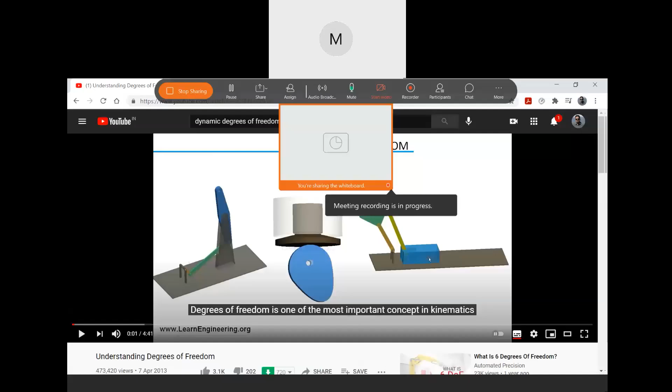So for your clearance, can you see my screen? Yes, sir. Okay.

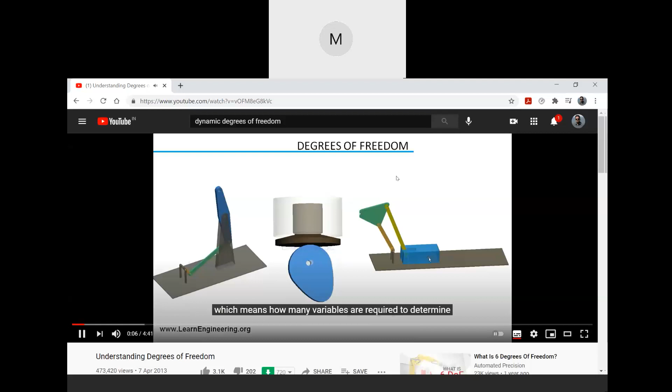Degrees of freedom is one of the most important concepts. Just try to understand. In kinematics, it means how many variables are required to determine the position of a mechanism in space. The position of this 4-bar mechanism could be determined just by knowing the angle or position of one of the members. So the degree of freedom is 1.

Similarly, the degree of freedom of this cam and follower mechanism is also 1. But to determine the position of this slider crank mechanism, we should know the angle or displacement of at least 2 members. So here degrees of freedom is 2. In this video we will learn how to predict degrees of freedom of a mechanism.

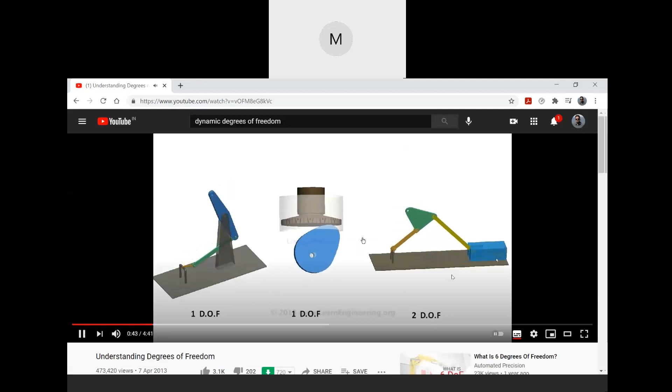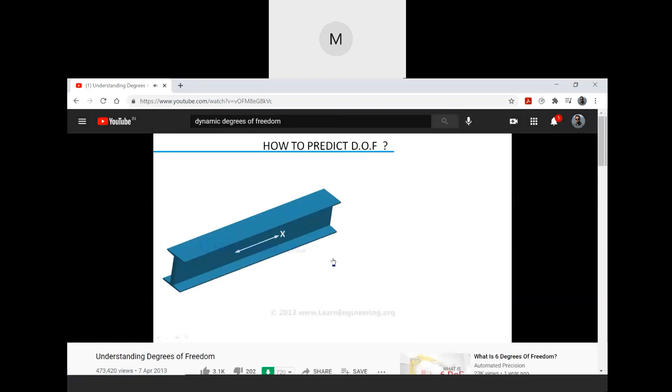Consider this rigid body in space. It could have 3 translatory motions like this. Also it could have 3 rotary motions like this. In total we need 6 inputs to determine its position. So, the degree of freedom of a rigid body in space is 6.

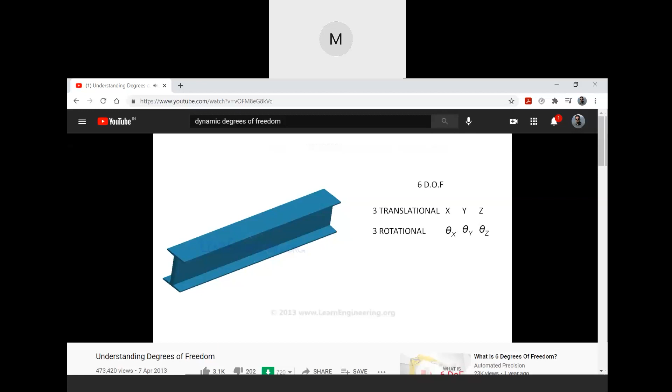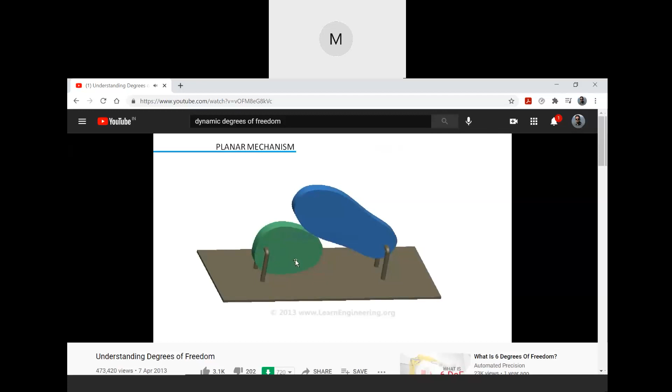If the body is in a plane, it can have only 3 motions: 2 translational and 1 rotational. So the degree of freedom of a rigid body in a plane is 3. Now, consider this planar mechanism. A mechanism is a collection of rigid bodies, or links, connected through pairs, provided one link is grounded.

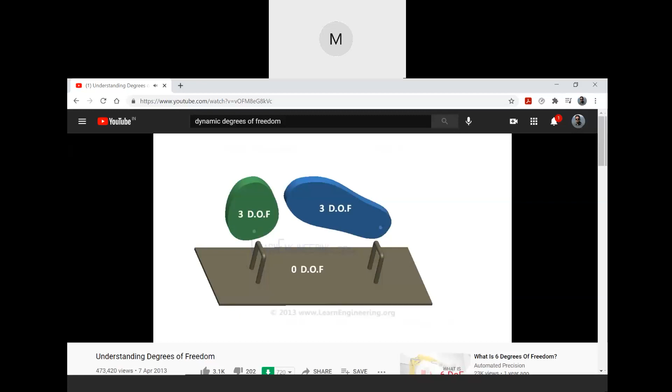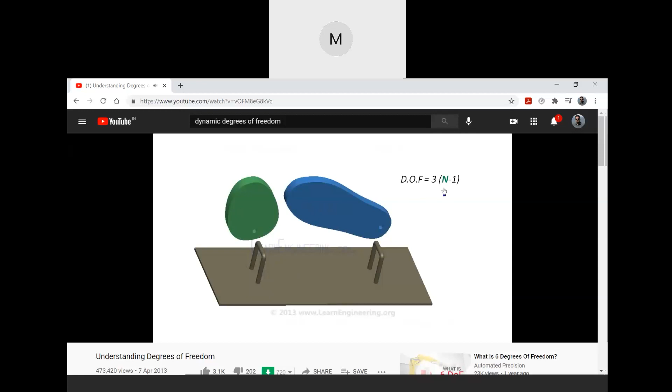If this system were not connected like this, then each link, except the ground, would have 3 degrees of freedom. So total degrees of freedom, or mobility, is 3 into n minus 1. N represents the total number of links, in this case 3. But when we connect it together through pairs, links will not have the same 3 degrees of freedom.

If the joint between 2 links is having surface contact, like this joint, then both the links will have the same translatory motion in x and y directions. So, for each such pair, there will be a deduction of 2 mobility from the total, where LP represents the number of pairs with surface contacts. Such pairs are called lower pairs. In this case we have 2 lower pairs.

Now consider this joint, which is having a line contact. If the joint between 2 links is having line or point contact, both the links should have the same translational motion along the common normal. However, it could have different motion in the tangential direction. So, for each such pair, there will be a deduction of 1 mobility from the total. This kind of pair is called a higher pair. Here we have got 1 higher pair.

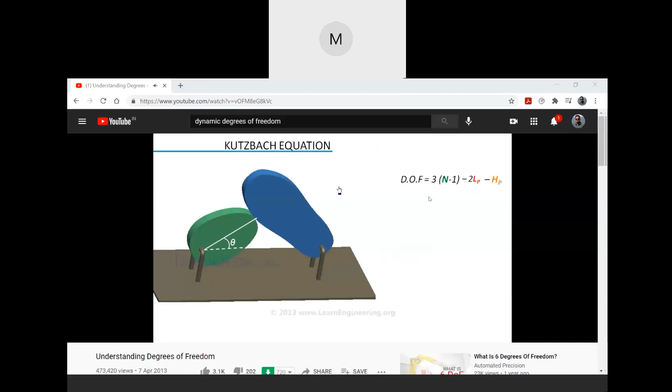So this mechanism has got 1 degree of freedom. Means, by knowing the position of only 1 link, we can completely determine this mechanism. So this is the equation to find out the degree of freedom of a planar mechanism, known as the Kutzbach equation. Back to the same old planar mechanisms. This mechanism is having 4 links and 4 lower pairs. So mobility is 1.

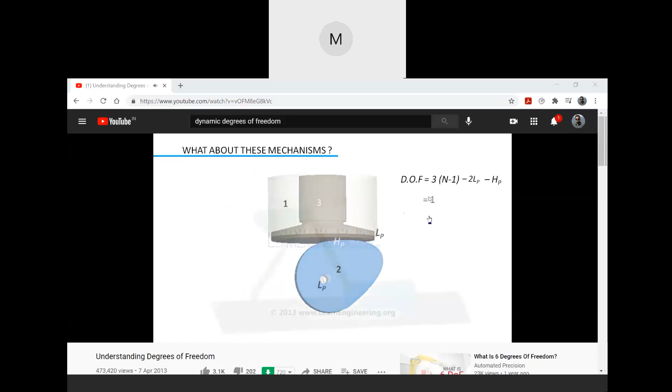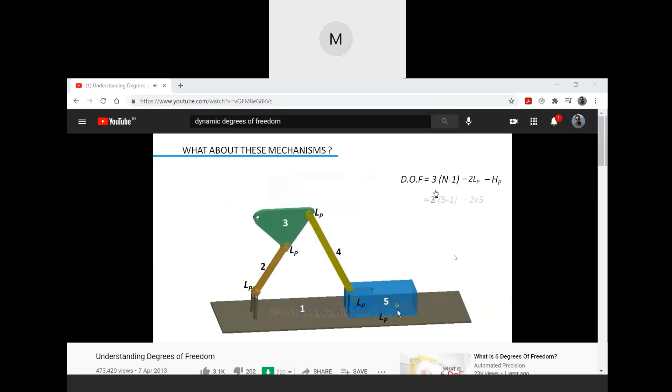Cam and follower is having 3 links, 2 lower pairs, and 1 higher pair. So mobility is again 1. This mechanism is having 5 links and 5 lower pairs. So mobility is 2. If the mechanism is 3-dimensional in nature, you could easily derive an equation for mobility using the same concept. The main thing here will be determination of the nature of the pair.

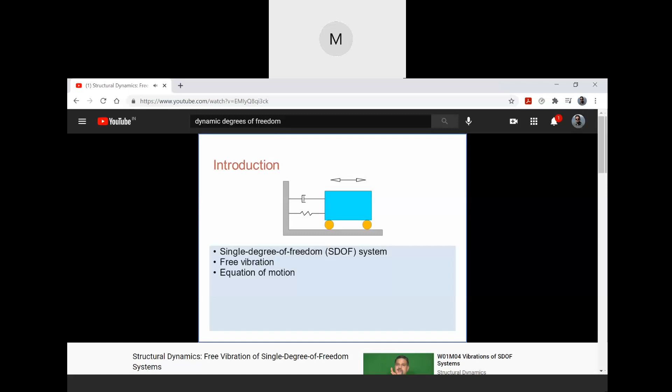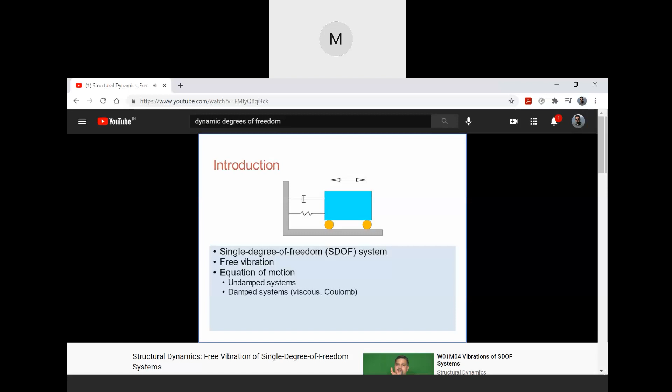Through the use of this simplified single degree of freedom system, we are going to show how the equation of motion is formed. We are going to study the free vibration of undamped systems in which no energy dissipation takes place. Subsequently, we are going to study the free vibration of damped systems in which energy is being dissipated, resulting in a decaying motion. Two types of damping are examined: viscous damping, in which the damping force is proportional to the velocity, and Coulomb damping, in which the damping force is constant.

So the solution to the equation of motion is derived analytically. By the term solution to the equation of motion, we mean the evaluation of the response of the system at any time instant during its vibration.

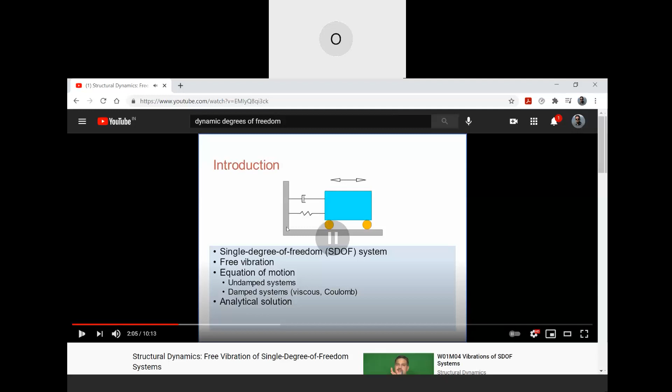Please mute your mic. Please mute your mic. Someone please ask him to mute his mic.

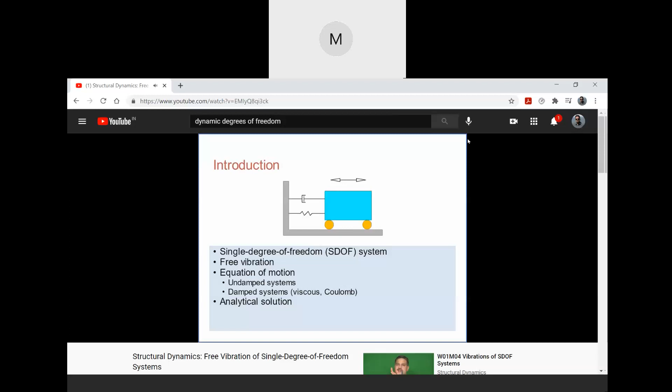Expressed as displacement, velocity, or as any other response quantity. An essential aspect in structural dynamics is the energy input in the system and the energy dissipation, which will also be examined. An appendix is also included with a review of a simplified version of the matrix structural analysis method. Using this method, the stiffness of simple structures can be calculated, which is then used to form the equation of motion.

We now present some examples of single degree of freedom systems. One such system is a car that is fixed on a base which moves only back and forth. Another system is a single-story portal frame whose mass is assumed to be concentrated at its top and is allowed to deform only in the longitudinal direction.

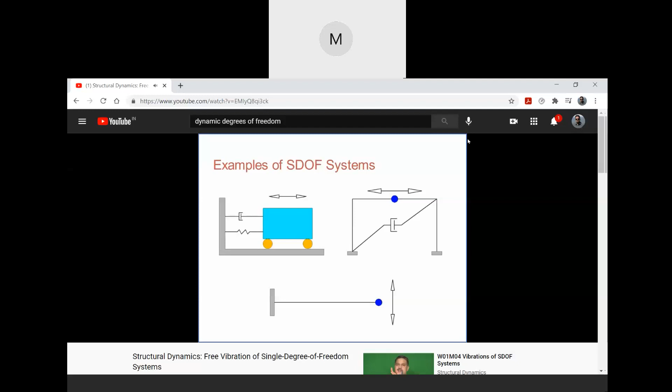A third system is a cantilever whose mass is assumed to be concentrated at its free end and is allowed to deform only in the vertical direction. The formulation we are going to present in this lecture can be used with all these systems. Let's examine the car, which is an example of a single degree of freedom system.

The car has certain properties, such as a mass, denoted as m, that is assumed to be located at its center. It is fixed on a base through a spring that has a certain stiffness, denoted as K. A viscous damper is also introduced between the car and the base to account for the energy dissipation during the motion of the car.

The damper has a certain damping coefficient, denoted as C, the meaning of which we are going to study later in this lecture. The position of equilibrium of the car is the position at which the elongation of the spring is 0. The difference between the position of the car and the position of equilibrium is called the displacement, denoted as U.

In this course, we sometimes use the term deformation interchangeably with the term displacement, for reasons that we are going to explain later when we examine earthquake excitation. Because in the field of structural dynamics, we are studying the response of the system with respect to time, the displacement is expressed as a function of time.

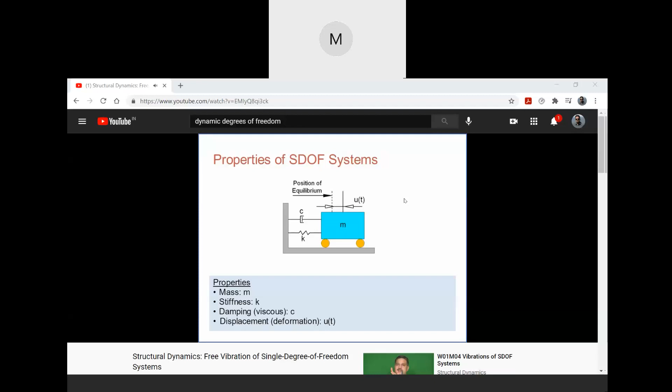In order to form the equation of motion, we first draw a free body diagram on which we mark the forces acting on the car when it is in motion. Shown in the diagram in white arrows are the displacement, the velocity, and the acceleration, and in black arrows, the forces. There are two types of forces: the internal forces and the external forces.

The first internal force is the stiffness force, denoted as Fs, which is caused by the elongation of the spring and is equal to the product of the stiffness constant K times the displacement U. This force has an opposite direction to the displacement.

The second internal force is the damping force, denoted as Fd, which is caused by the motion of the system and is equal to the product of the damping constant C times the velocity U dot. This force has an opposite direction to the velocity. The velocity is denoted here as U dot and is the derivative of the displacement with respect to time. In this case, and in most of this lecture, the term damping refers to viscous damping.

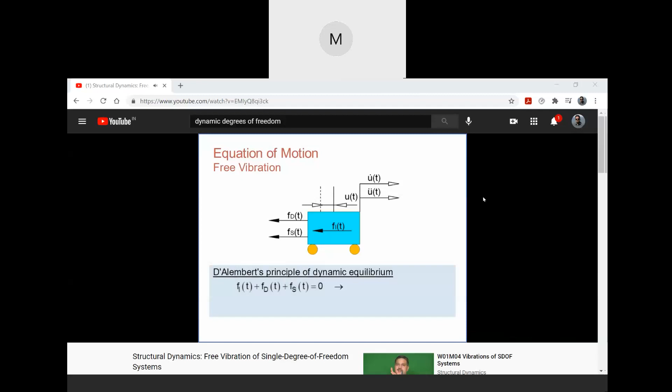Therefore, we sum up all internal forces on the left-hand side of the equation and the external force, which is zero in the present case, on the right-hand side. The resulting equation is the equation of motion. We can see that both approaches result in the same equation of motion.

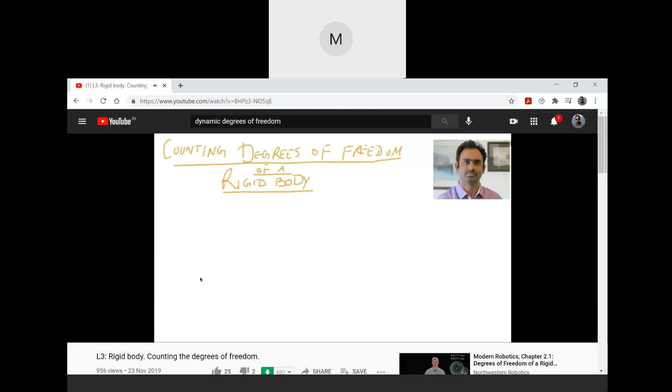Now count the degrees of freedom a rigid body has. Let us say that our body looks like this. Okay, it is a three-dimensional object. It's rigid, meaning the distance between different points in the body, let's say this is some point and there's another point in the body, the distance remains fixed with time. That cannot change. Let's say the distance between these 2 points is, for example, A.

Clearly, there are no true rigid bodies in the universe. I mean, these distances will change, but if you are not interested in the very finer details, many bodies can be considered to be rigid. Okay. Let's see how many degrees of freedom this one has. So what we really are asking is, how many numbers should be specified to tell uniquely where the object is and how it is oriented, right? Meaning where each particle of this body is located.

Okay. Once you specify this, you have specified everything, and the total numbers you need to make that specification is the degrees of freedom. Now let's take this point first. If this point is really located here in space, in specifying that it is here, you use up 3 numbers, and those 3 numbers are the x, y, and z coordinates of this particle. So you have used up 3 numbers in bringing it here.

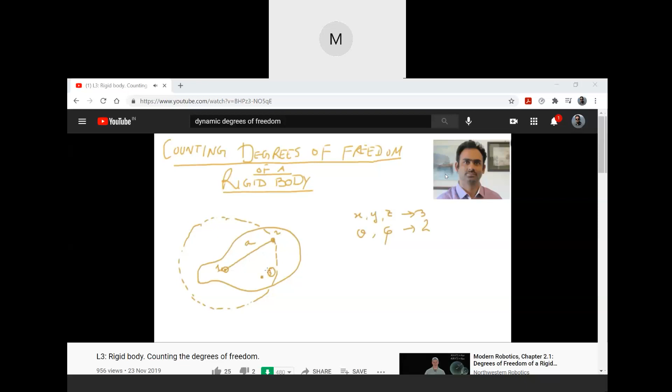Is the rigid body uniquely fixed in space? Well, no, not really. Take point 3. What we are asking is, if I have told particle number 1 is here and particle number 2 is here, does it mean all other particles are fixed at their locations? No. This particle number 3 could be anywhere on a circle about this axis. You could clearly rotate this entire body about this as an axis.

If you do that rotation, point 1 will still be here, point 2 will still be here, but all the other points apart from the ones on the axis will change their position. So clearly the entire body is not fixed in space by just telling this and this. So let's fix this one. How many numbers do you need to fix point number 3? You need only 1 number, because this has a freedom.

Once you tell the angle it makes with some reference axis, let's call it theta prime, point number 3 will also be fixed in space. Now, is there anything else left? Once you have said this guy is here, this guy is here, and this guy is here, can a fourth particle be somewhere else? There is no freedom left now. Once points 1, 2, 3 are fixed, there's nothing you can do to change the positions of other particles. It's all rigidly fixed because the distances are all fixed.

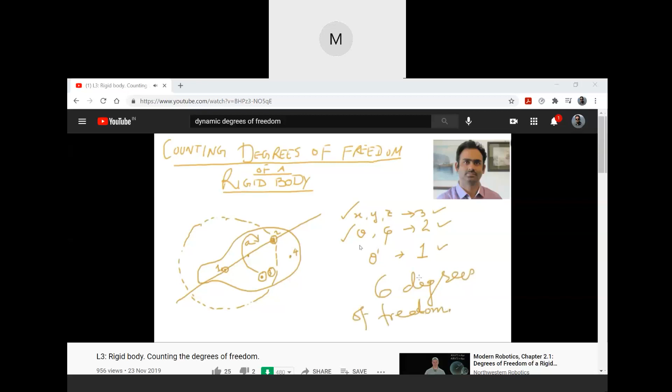From this counting, you clearly see that you have a total of 3 plus 2 plus 1, 6 degrees of freedom. So in general, let me write down, next page maybe. So in general, a rigid body has 6 degrees of freedom.

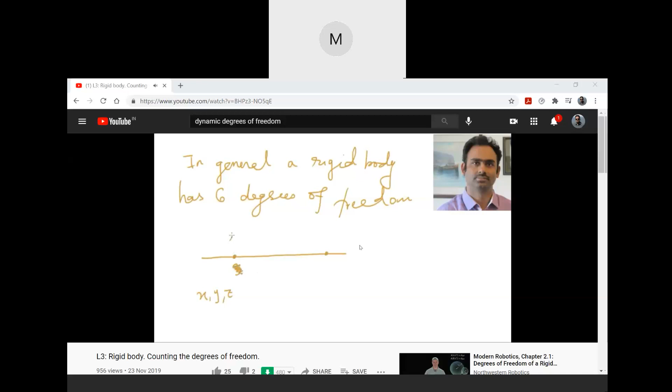But there may be special cases where the degrees of freedom may be less than this. For example, a one-dimensional rod: how many degrees of freedom will it have? Take any 2 points on it. This one, as before, has 3 degrees of freedom; to bring it here, you need to specify its x, y, and z coordinates. This one will be called point 1.

Point number 2 could be anywhere on the sphere centered about 1, just like before. It's not looking very nice, I will not draw. Just imagine a sphere of radius a, where a is the distance between 1 and 2. To specify where point 2 is on that sphere, you need 2 more numbers, theta and phi. Once you have specified point 2, there is nothing else to be specified, because all the other points get fixed in space.

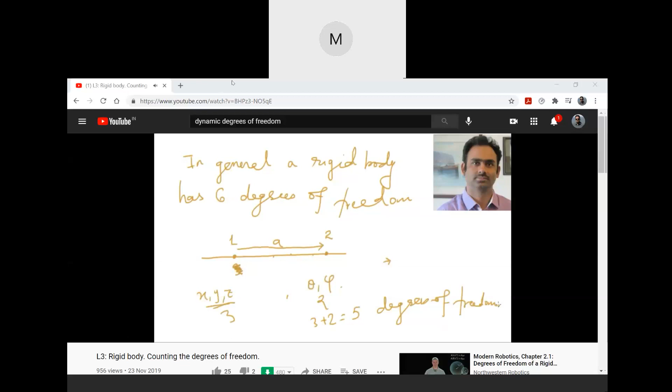So this special case has 3 plus 2 equals 5 degrees of freedom. Okay, that's good, and maybe later I will talk more about rigid body motion.